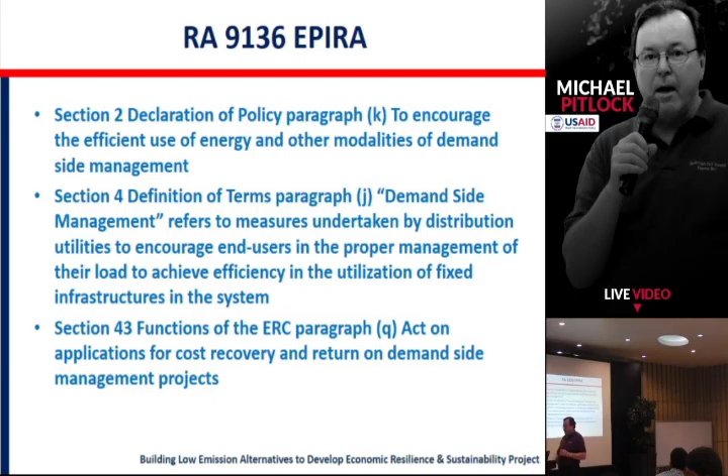The only problem was, when was it filed? 1998. It was actually an ERB case. From 1998. They had a demand-side program. Part of it was a lighting program, replacing incandescent with CFL. Of course, we now know that technology has moved on. We don't talk so much about CFLs anymore, we talk about LED. But that was the only one I found. In all those years, that was the only one I found, which kind of surprised me.

Demand-side management entails actions that influence the quantity or patterns of use of energy consumed by end users, such as actions targeting reduction in peak demand during periods when energy supply systems are constrained. Peak demand management does not necessarily mean decreasing the total energy consumption, but can be expected to reduce the need for investment in networks and power plants.

It's not always about reducing the amount of energy. It's all about the shape of the curve, because that's where the inefficiency comes from. We all know that the flatter the curve, the least cost, because we're fully utilizing that fixed infrastructure. We're fully utilizing the capacity of those power plants.

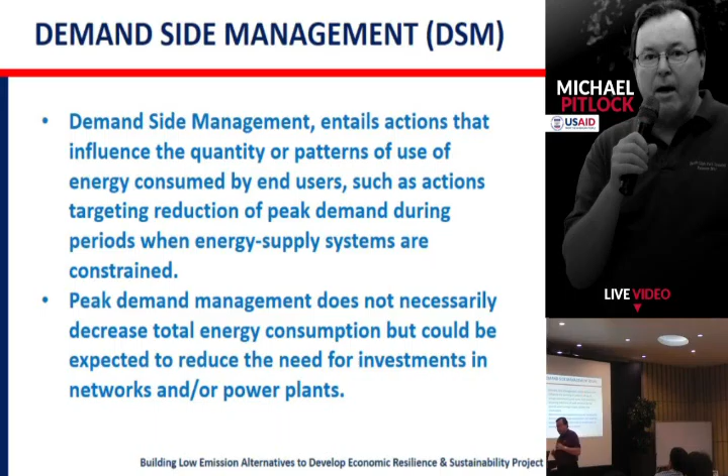If you build a 600 megawatt plant, and it has a plant factor of only 50%, half the time you're wasting it, okay? But you're paying for it. It's kind of like the person that buys a car and only uses it on Sunday to drive to church. You're still paying for that car the other days of the week, but you only use it one day. So we want to fully maximize the efficient use of this fixed infrastructure. Some DSM programs target kilowatt hours. Some DSM programs target kilowatts demand.

Now let's think about your customers for a while. Right now, all of your customers are captive. A captive customer, as defined in EPIRA, is a customer that does not have choice of supply. That means those captive customers rely on all of you for both their energy, their supply, as well as the use of your wires, the demand they place upon your wires. Now, if we get to the point where retail competition comes into play, you're still going to be concerned about both supply and demand for your captive customers, but for your contestable customers, you're no longer going to be responsible for supply.

That does not mean, and I can't emphasize this enough, that does not mean that you have lost a customer. Because that contestable customer, even though he gets his supply from somebody else, relies upon you for something very, very important. The wires. You will never, ever lose a single customer because of migration to contestability. Because you are always going to be the one providing the wheeling service, the wires. And so from a demand-side management perspective, you're still going to be concerned about the efficient utilization of that fixed infrastructure.

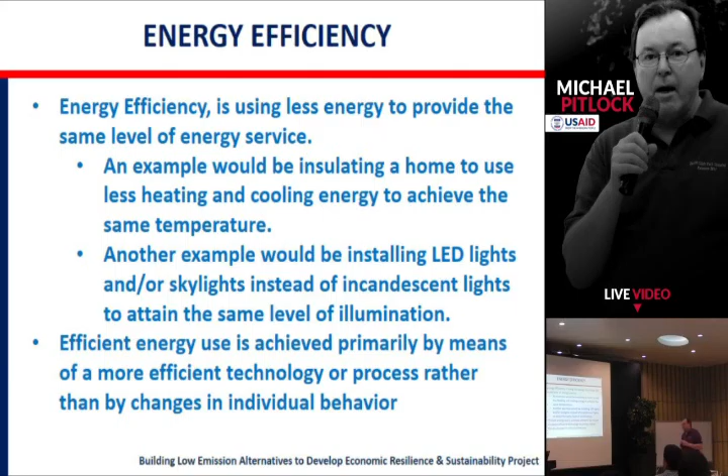And that's why later on today, when we start talking about the cost-benefit model, we're going to work through a couple examples of lighting programs and show what their cost-benefit analysis reveals. Energy efficiency is basically about technology as opposed to changing people's behavior. It's not about making sure we turn off the lights, it's about having an efficient light bulb in the first place. So energy efficiency, because we want to maintain the same level of service, is mainly driven by technology. That's why today we talk about LED instead of CFL. Technology has made a leap.

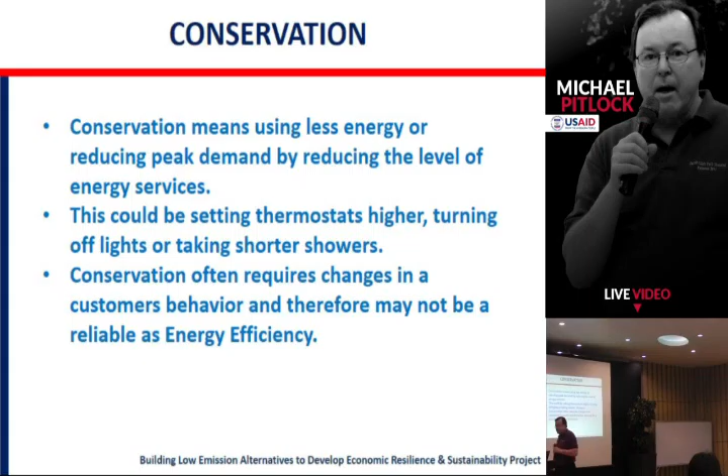Conservation, on the other hand, as Max said, is basically using less energy or reducing peak demand by reducing the level of energy services. One of the big examples is how we set the thermostat. What temperature do we set the thermostat at to cool our homes? Do we put it at 20? Do we put it at 23? Do we put it at 17? It's going to impact the amount of energy we use. But it's also going to impact our environment. The same amount, lesser energy, but also lesser service.

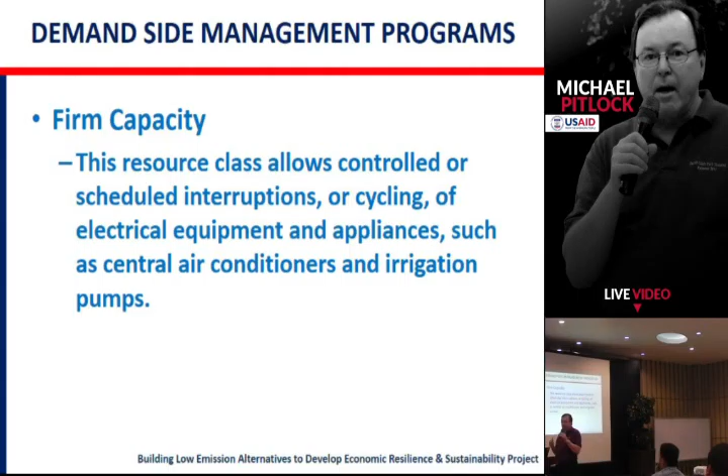Now, the other thing about conservation, though, conservation is not about technology. Conservation is about changing our habits. Can we feel comfortable with having a higher temperature on our air cons? That we feel comfortable in taking a shorter shower, maybe not as warm? Can we change our behavior? Many DSM programs, and we're going to talk about different types of programs in a little bit, rely upon changing people's behavior. Those are the really, really difficult ones to implement.

I always tell people, old people like me, it's real hard for me to change my ways. I'm a creature of habit. I like my house to be at a certain temperature. I like to take long showers that are very warm. That's me. I've been that way for 64 years, and hopefully I'll be that way for a little bit longer. But it's real hard to change people like me.

So who do we change? Actually, Serge mentioned it. The youth. Children, that's who we can change. Under other USAID programs, under SEDP, we had a lot of energy efficiency education campaigns targeting the youth. Because there's no hope for me, okay? I'm stuck in my ways. There's no hope for me. But there is hope for the children.

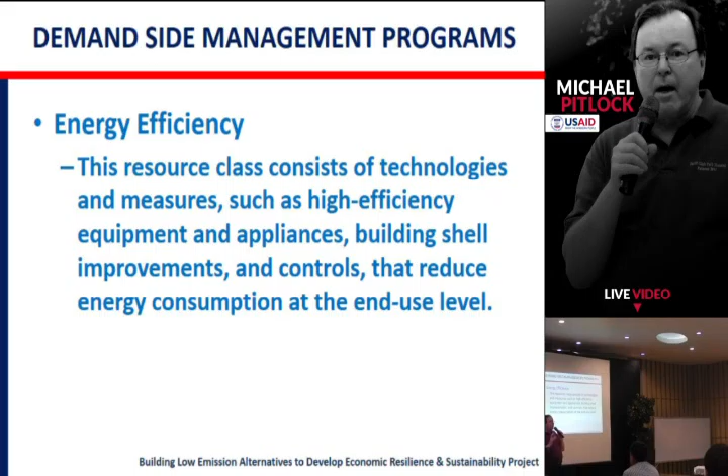And the other thing we found out when we had these programs in the past for the children is that the children would go home and would actually teach their parents. They would influence the behavior of their parents based on what they learned in school. So that's another good reason: if we're talking about changing behavior, we need to include the youth in the program. We get the greatest chance of success when we do that.

Okay, let's talk a little bit more in detail about some of the benefits. Max mentioned some of these. We're going to talk about them in a little bit more detail now. I said that price was a big influence. So one of the benefits is it reduces a customer's energy bill. Now that assumes that the customer was a participant in the program. So one of the selling factors: you're designing a DSM program and you want to get a certain level of participation.

The only way for a demand-side management program to be successful is at least the participant has to have and see a reduction in his power bill. Why else would he join the program? Unless he's so environmentally conscious that he's going to focus on the emission reductions instead.

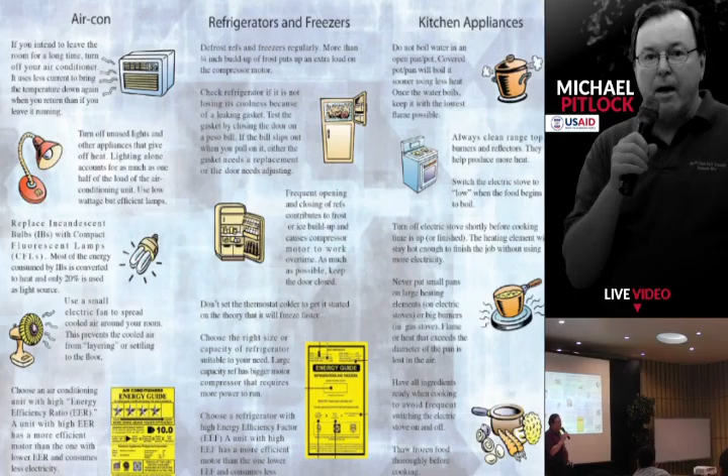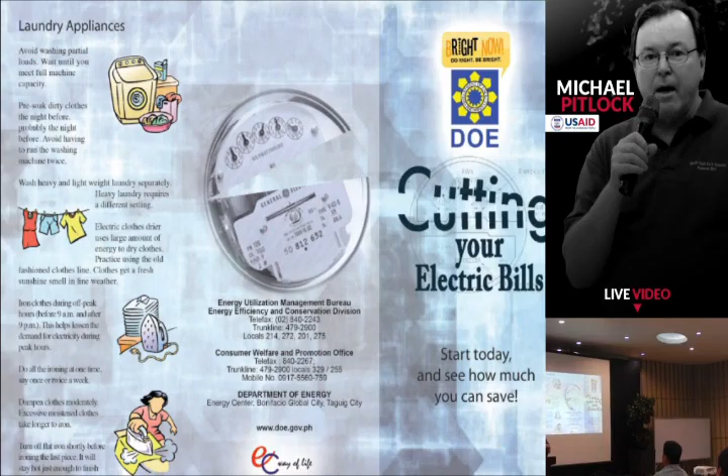But there's also a downside to it. Economic development leads to higher energy consumption. So we're recognizing that just like the growth in population, the growth in economic development is going to drive growth in the power sector. If we strive to have development that is, again, less energy intensive, that's what we want to attract.

Creates long-term jobs with benefits to the community. Economic development leads to jobs. Jobs lead to higher income for families. As I will show you in a little bit, higher income for families requires an increase in energy consumption. I'll show you the statistics in a little while, but it really comes down to two things. More people, more electricity. More economic development, more electricity.

More people with more money. That's the combination. Why is that the combination? If we have more people and those people have more money, what do they do? They buy appliances. They buy all the gadgets. That's what uses the electricity. It's not the person themselves. It's the aircon they own. It's the ref that they own. It's the TV that they own. So you combine people and money, that's demand for electricity.

Increases the competitiveness of local enterprises. If prices come down, the local enterprises can be more competitive. And in today's global markets, that's extremely important. You know, we hear all the time about how prices are so high in the Philippines. And that has an impact on the competitiveness of our domestic industries.

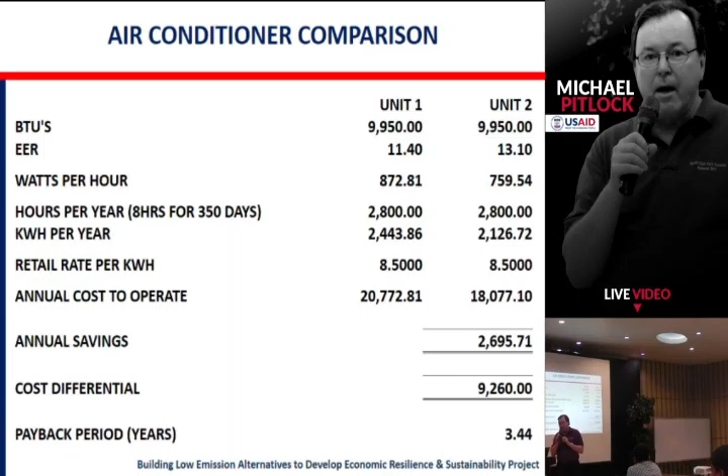Integrated resource planning looks at every possible option for meeting that demand, not just building more power plants. Okay, so the main thing that it looks at is not just the supply side, but the demand side as well, through demand side planning. Okay, rather than saying over the next 20 years, we have to add 5,000 megawatts of capacity. Well, that's what the forecast says.

But maybe if we implement the appropriate demand side management programs, maybe we only need 4,000 megawatts, or even less. Okay? We reduce the need for more transmission, reduce the need for more distribution, reduce the need for more generation by integrating demand side measures into the planning process.

Let's talk now a little bit about the effectiveness of different kinds of demand side measures. We can have everything from a very firm resource, high reliability, but very low customer choice. It's a measure that we basically impose upon the customer, and that's not necessarily a bad thing. All it means is that the customer gets the benefit of it without him having to change his behavior and take an affirmative action. So that gives us a high level of reliability because we're not relying upon a customer changing his behavior.

On the other end of the spectrum is the education campaigns, which rely completely on changing people's behavior, or giving them enough information that they make prudent decisions. Okay, information is very critical. People cannot make good choices. They can't make good decisions if they don't have information. Okay, so let's look at some examples that fit into these different categories.

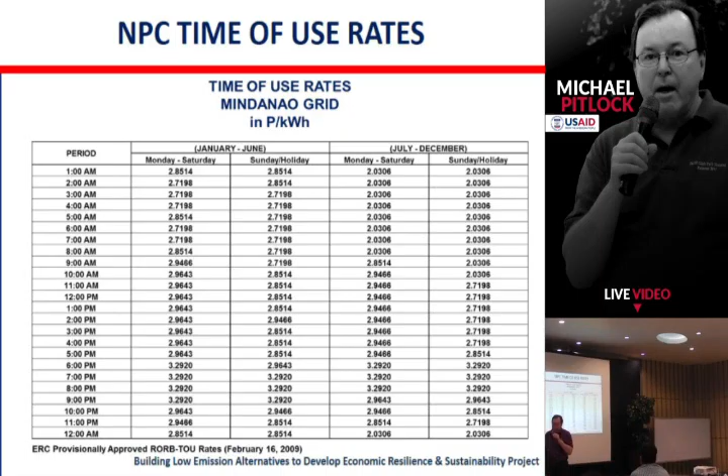Then it's a matter of applying some arithmetic - this isn't even mathematics, just multiplying and dividing. How many hours? Say we use our aircon 8 hours a day, 350 days out of the year, so we get a total of 2,800 hours. So how many kilowatt hours per year? We take the 2,800 times the watt per hour calculation, divide by 1,000, so we can turn the watts into kilowatts. Then we end up with how many kilowatt hours in a year we will consume.

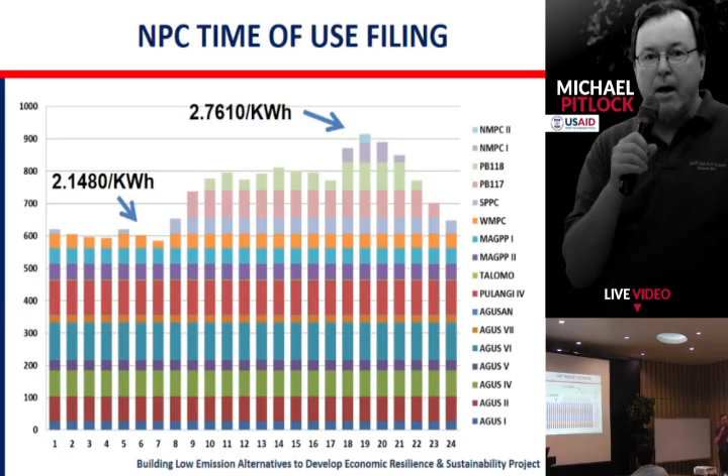Okay, the next factor in the equation is the retail price. As a residential customer, what is the retail price that I pay? Now, this is an area where if you were in Metro Manila making this calculation, the answer would be a lot different than if you were here being served by Sapelco, or one of your customers in your franchise area. Why? Because your retail rate is a lot different, mainly because your generation rate is a lot different.

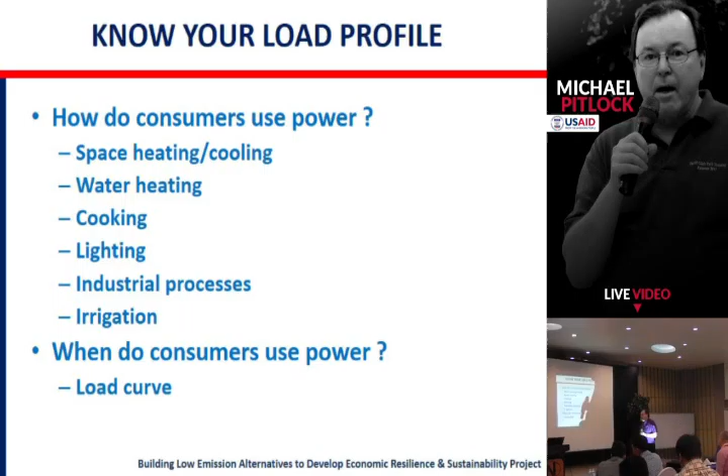In this particular example, we have an 8 peso 50 centavo retail rate, so we can calculate the annual cost of the two different aircons. We see that there is an annual savings of almost 2,695 pesos per year. If the cost differential was 9,260 pesos, it would take a little over 3 years to make your money back.

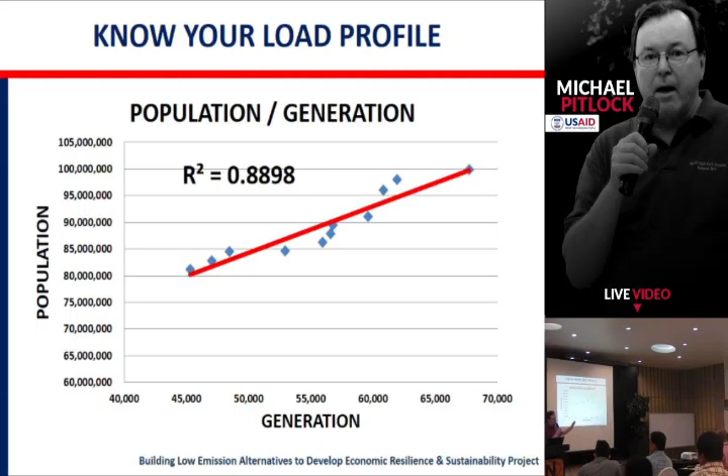Now there are certain inputs that affect this. A higher retail rate, the payback would be shorter. A smaller cost differential, the payback would be different. The point I'm trying to make is that without some education, without some additional information, the average consumer will not be able to know this. They'll look at the price differential, the 9,000 plus price differential, and say, why am I going to pay 9,000 pesos more for the same level of aircon? Without this information, they make that calculation.

How many of you have ever seen this website, whatmatters.org.ph? It's basically an appliance calculator, but it has information specific to different municipalities. You can actually make comparisons on this website to find out, in my particular locale with my particular rate, what would I save by buying. And it has specific brands of appliances, so you can make very smart calculations by going to this website.

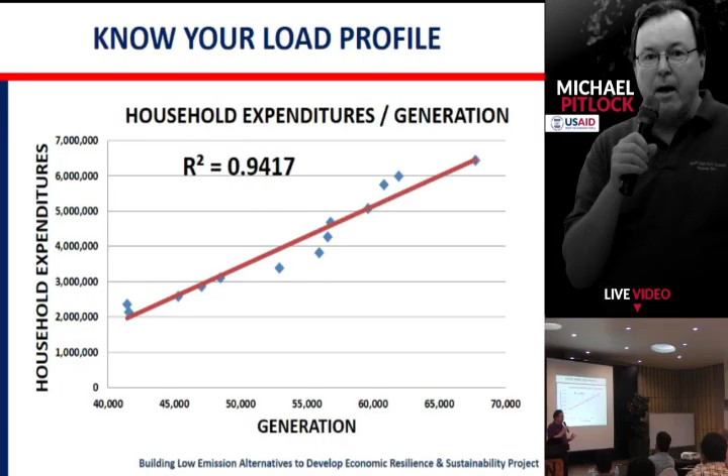Now, what's the problem? No one knows about this website. Another opportunity for an information, education, communication plan. This website is specific to the Philippines - it uses information from the Philippines, the appliances that are sold here. Not just some theoretical calculation, but it talks about the actual appliances that are available in the Philippines.

This is the kind of information that customers need. And as more and more customers have access to the internet, there's a wealth of information out there. You can go to the DOE website - all that stuff that I showed you from DOE is all on their website. You don't even have to go to their office and get a copy of it. You can see it right on their website.

Okay, let's talk now a little bit about how do we design a program. We've talked about why DSM is good, why we want to do it, what drives us to do it: the financial incentives, the environmental incentives, the energy security incentives. Now let's design a program.

The first thing we have to decide is what kind of a program are we going to have? We have three choices we can make. Let's start with the information campaign. Okay, we decide we want to have an information campaign.

There's other decisions that have to be made. Do we want to have a general kind of message to a general audience where we talk about things like energy efficiency, kind of like with the DOE brochure? Or do we want it more sector specific?

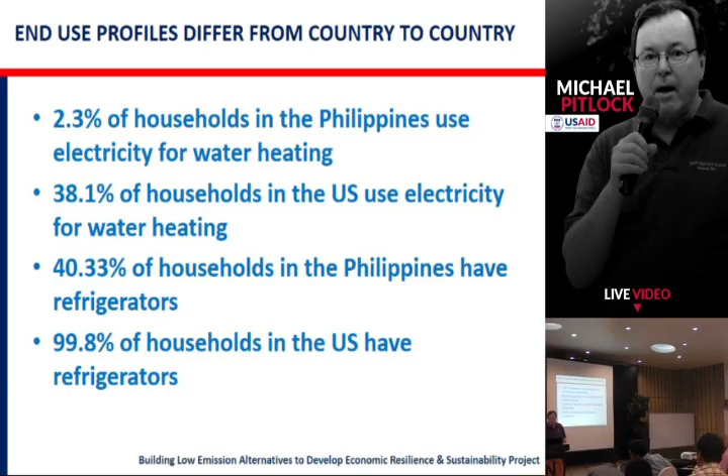When it comes to commercial and industrial customers, a lot of times what you'll see is a shared savings approach. These are normally done not necessarily by distribution utilities, but by energy services companies. I'll go to a factory and I'll tell them, I can save you 25% off your power bill, and all you have to do is give me 20% back. You get to keep the 5%. Or if I'm real generous, I'll tell them you can keep the 15% and I'll just take 10%. You share in the savings. So the distribution utility or the energy services company becomes a partner with that industry in trying to lower the cost of power, reduce the level of emissions, and reduce the level of energy required.

Rebates, that's kind of like my discount coupon example. And you can do it for other things as well.

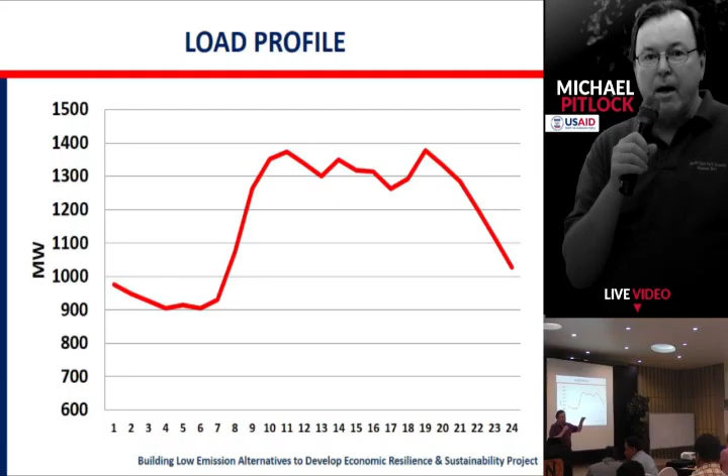One of the case studies we'll look at is a situation where the distribution utility teamed up with a retailer to give a 50% discount on LED lights. Basically it's like giving a rebate or a coupon. From the customer's perspective, all he sees is the reduced price. The retailer is made whole because the distribution utility pays the retailer to give the 50% discount, and then he goes to the ERC and gets cost recovery.

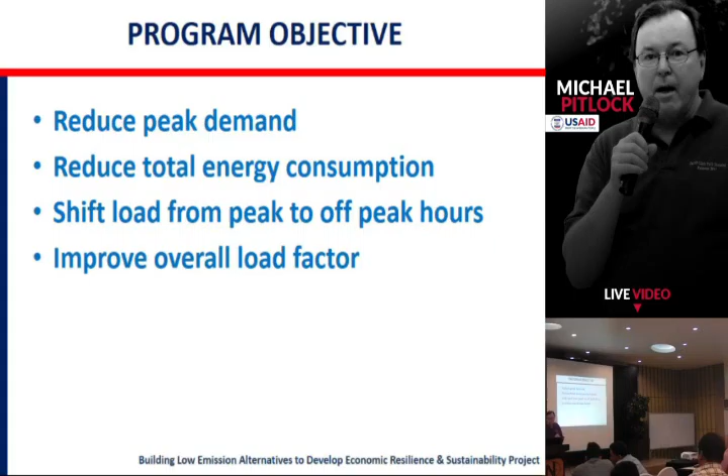Alternative rate designs. In my opinion, these can be effective in certain circumstances. Right now in the Philippines, they're not effective. Why are they not effective? Two reasons. First of all, in Luzon and Visayas, let me back up one step.

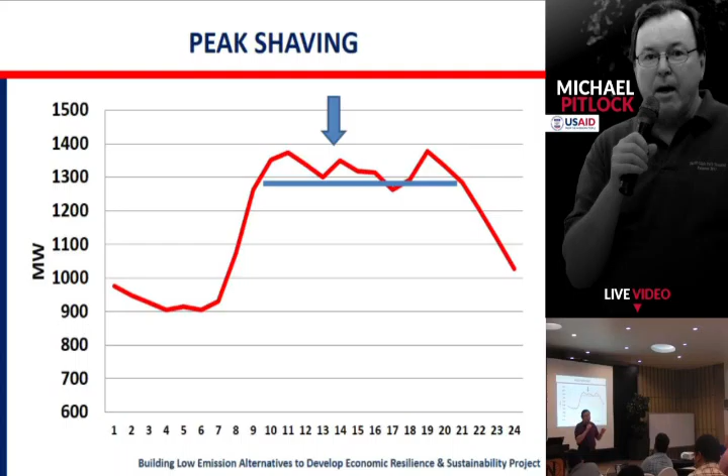The only entity other than WESM that offered time of use pricing was NPC. Here in Mindanao right now, you still buy probably the majority of your power from NPC PSALM. For example, we're here in Cagayan. CEPALCO buys about 60% of its supply, even today, from NPC, and there's a time of use pricing schedule. How much do you think Meralco buys from NPC? Zero.

In Luzon and Visayas, almost nobody buys from NPC anymore, with a couple of small exceptions. Why? All the power plants have been sold, all the IPP contracts have been privatized. So there's no time of use price signal other than WESM, which is not a time of day pricing, although it is hourly pricing. I'll talk about that in a minute. So there's no price signal going out.

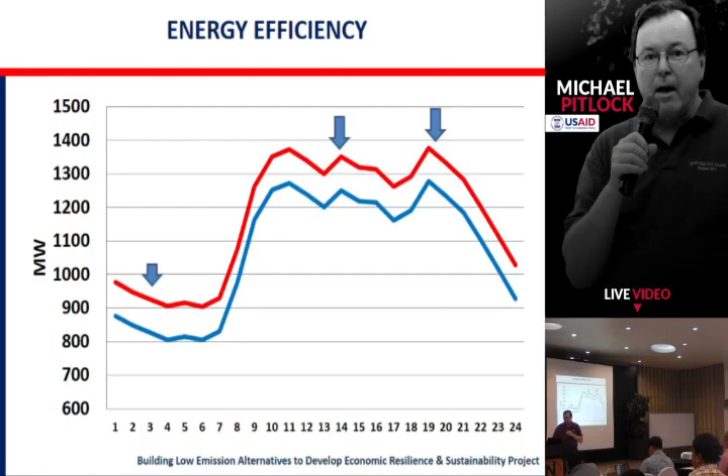Now here in Mindanao, you still have a price signal going out, but it's only at the wholesale level. The end-use customer doesn't see it because it's only in the wholesale rates, unless your DU decided to have its own time of use program where you can mirror the NPC rates, but that's done on a voluntary basis. I know that when Meralco tried it, very few people signed up. So I don't know if any of you have voluntary time of use pricing, but if you do, I'll bet you don't have very many customers taking advantage of it, if any. It was not a very successful program.

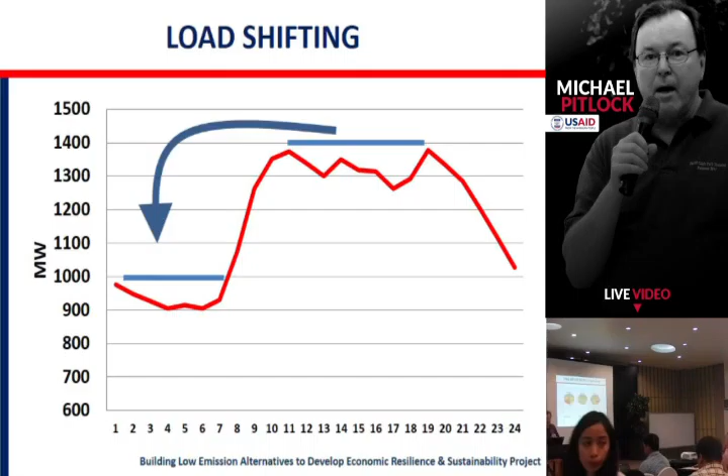Don't worry, I'm going to go back to those. I should have reordered these slides a little bit. I want to keep talking about time of use pricing. There's another reason why time of use pricing in Mindanao would not be very successful.

Given the fact that one of the main drivers of peak demand in Mindanao is residential lighting, there's very little you can do in terms of load shifting when it comes to lighting. Why? Because you can't control when it gets dark, unless you try things like daylight savings time and all that stuff they do in the U.S.

So why? That's one of my favorite questions — why? And my favorite answer is, it depends. Because nothing in the power sector is ever strictly black and white. There's all kinds of exceptions. So when you ask why, the answer is always, well, it depends.